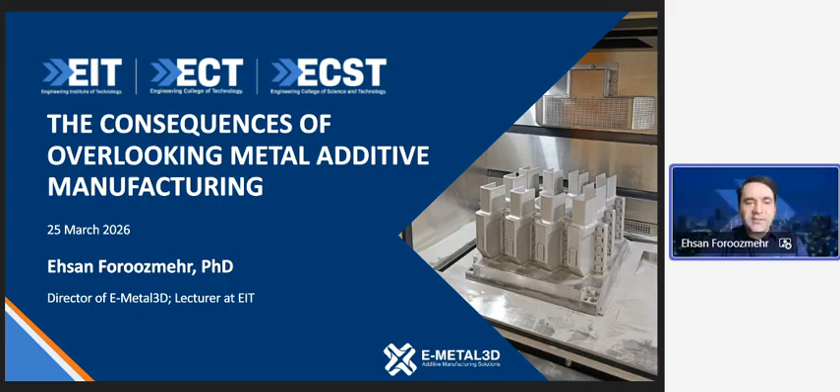As the title shows, we are going to talk about metal additive manufacturing, and hopefully that - which has been my interest in the past 20 years - I hope it's going to be something attracting your attention from now on.

Just a brief introduction about myself. It's now the 20th year of my engagement with additive manufacturing, so yeah, I feel a bit old at this point. I started working on additive manufacturing back in 2006, and at the time it was not really named additive manufacturing. It was more about laser deposition systems and laser powder deposition systems and so on.

That led me to doing postgraduate and postdoc research activity at University of Waterloo later on. And then as a faculty member, I started my job to teach and also do research on additive manufacturing for about 11 years. I co-founded a company to manufacture metal 3D printing systems, the ones that we talk about today.

And also, in 2022, I joined Aurora Labs, the company in Perth manufacturing laser powder bed fusion systems, and worked as their technology manager. Then I found this topic to be really worth investing more.

So I co-founded E-Metal3D in 2024, about mid-2024, and since then I've been the director of E-Metal3D. And in parallel, this is my third year of working at EIT, getting to know a lot of students and doing research along with them.

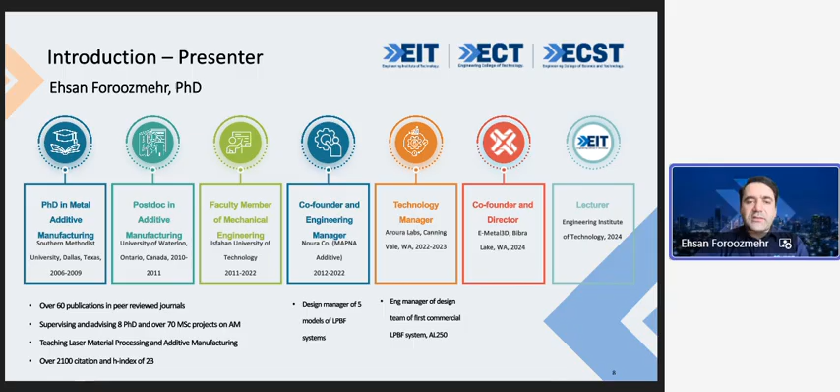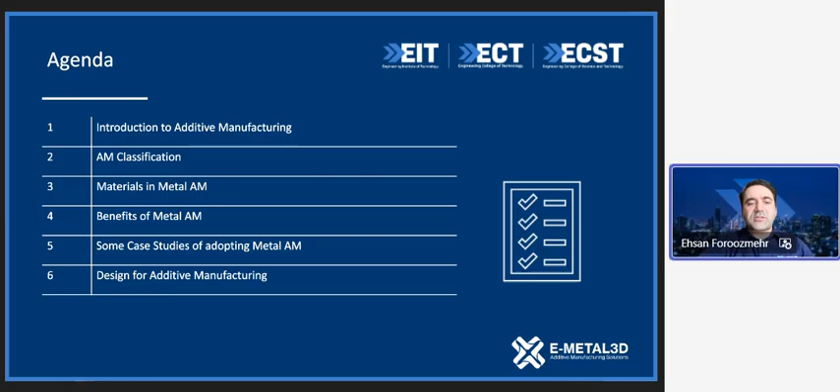So let me just move to our agenda. Hopefully this presentation will cover these topics. As you can see, we'll talk about some classifications, some general concepts about additive manufacturing and the benefits that we can get. And the interesting part would be some case studies on metal AM and design for additive manufacturing, which is relatively a new concept.

In oil and gas, a lot of companies recently, specifically from the past decade, have started to investigate the type of components that could be manufactured with metal AM. More importantly, on the subsea industry, we know that weight is a key challenge in subsea and also in aerospace. These are the industries where weight reduction is really important.

On mining, also, although weight reduction is not really critical there, acquiring and finding out the proper providers and suppliers is the key factor.

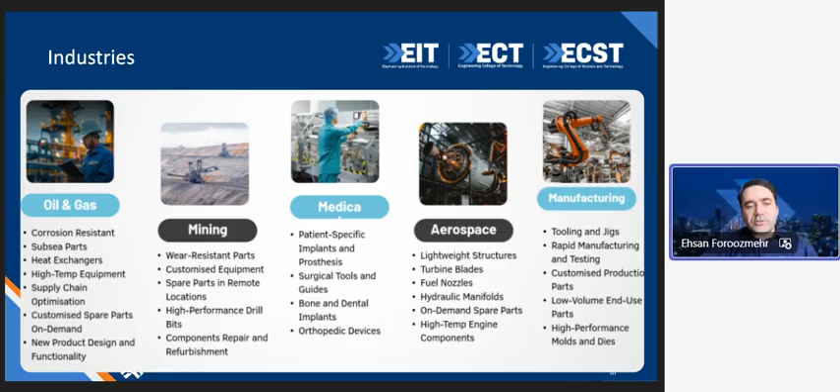Whatever could be manufactured out of metal can be a candidate, but by considering the limitations, which we are going to talk about in a minute.

So let's have a brief introduction: what we actually talk about and name as additive manufacturing. In general, we know that we have three different methods of manufacturing: two traditional ones of material removal and forming - material removal basically starts with the bulk and we start removing the material.

The forming has a mold, whether it is casting, forging, or any process like that - the part is formed toward the press force or high temperature and so on. Then we have the third one, additive manufacturing, where the part is made layer by layer.

It is surprisingly not a new method of manufacturing. Probably we can say even the first invention of humans, making their houses thousands of years back by putting bricks and stones on top of one another - they were using that for manufacturing.

It's not really new. What is new is the actual manufacturing of industrial parts with this technology, which now we can say is about 4 decades passed from the first invention of 3D printing, 3D printers. So nowadays we're not talking about a new technology, but we have to really learn about the technology's limitations, capabilities, and new aspects.

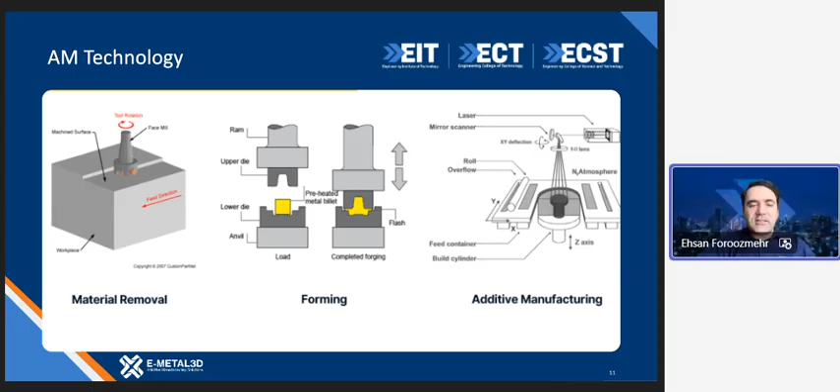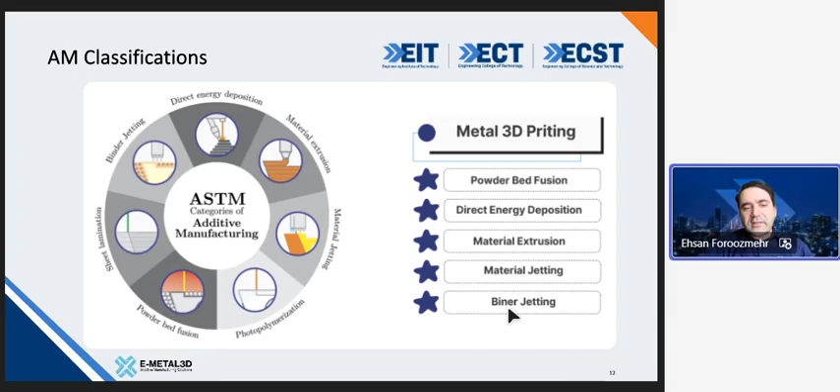Out of these 7, 5 of them are able to manufacture parts out of metal. So when we talk about metal 3D printing, we are not just talking about 1 or 2 specific technologies - we're talking about maybe 5 different categories, and within each category you may have multiple technologies. But not all of them have the same potential, and I'm going to talk about that in the next slide.

And we have 3 other technologies that are indirect metal 3D printing technologies. By that I mean you actually have metal material in the form of powder embedded in a matrix of polymer that acts as a binder to bind those particles together. As you can imagine, this first step of indirect printing is not really metal - it's a composite of metal and polymer.

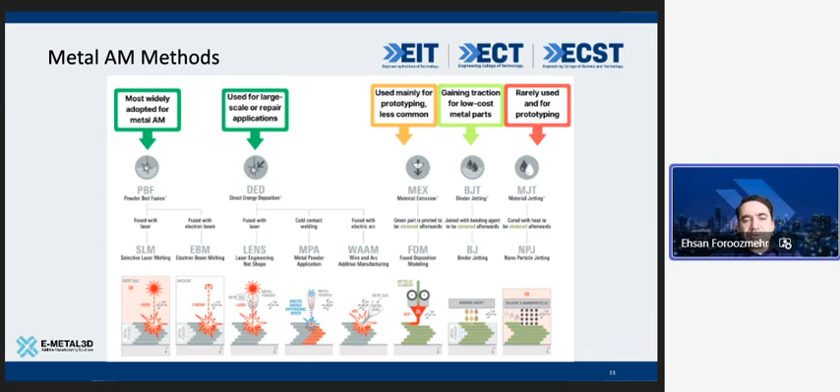It's interesting to know that all three technologies of the DED category have manufacturers in Australia. We have a company in Sydney, LaserBond, for LENS. We have SPEE3D for the second one, and we have AML 3D in Adelaide for the third one that are manufacturing this technology. There are many applications and so much to talk about on this slide, but I will move on to not miss the time. Hopefully if you have some questions, I will be happy to answer at the end.

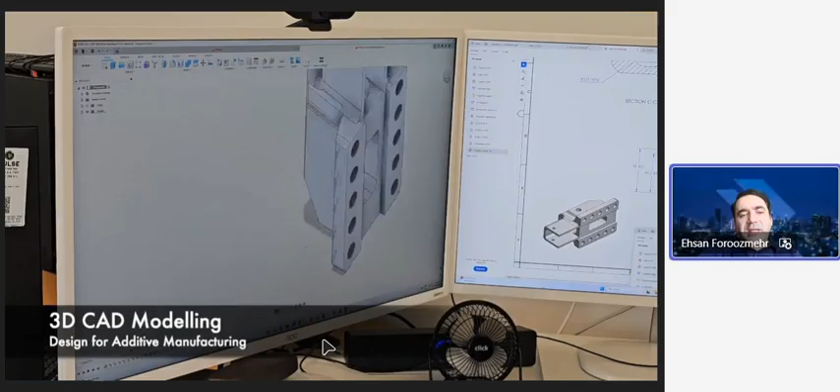This is a movie showing the process. The sound is not really needed. So this technology starts with a CAD model. When we talk about a CAD model, it can come from a design in a computer, or it can come from a reverse engineering process, 3D scanning. Anyway, you need to have a CAD file.

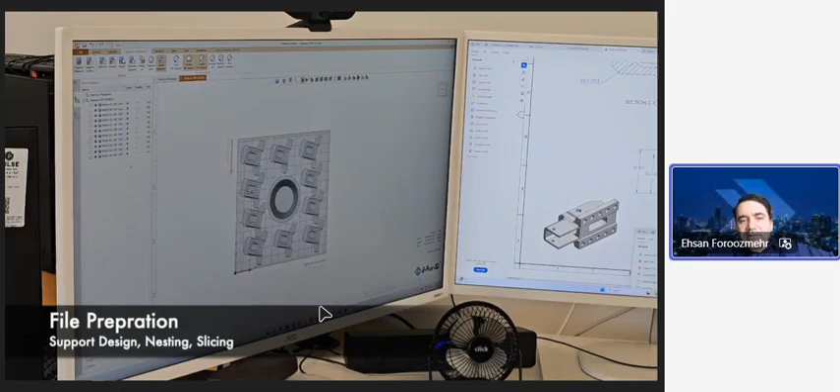Once you have the CAD file, you go through the support design process, where you actually design the support structures, and the support structure will let us overcome the difficulties during the process, as you can see.

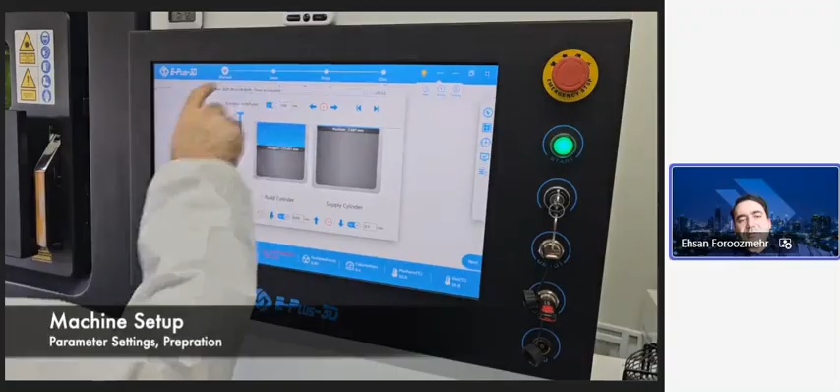And we slice the parts based on the layer thickness, which is critical for us. The layer thickness, we talk about tens of microns. So it is about 30 microns, 40 to maybe 100 microns, or even more. These are the layers that you can actually see, and all the parameters, including the laser movements.

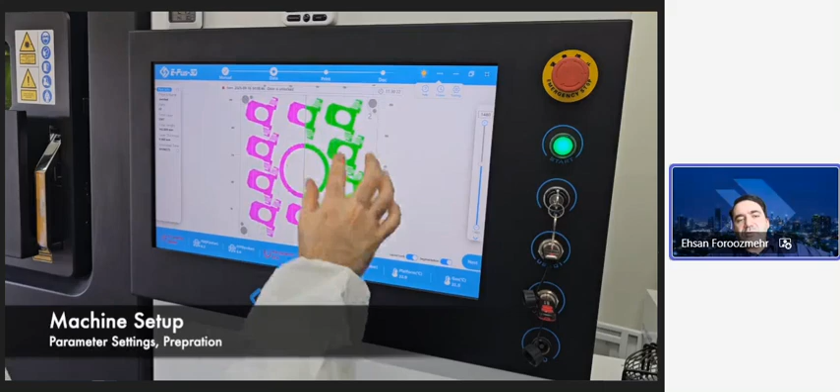Are the tracks that you can actually see in this movement. So everything is predefined in the software and then transformed into the machine. Then the machine starts by taking the information from the software and sending it through the laser system and scanning system to precisely find where the laser has to move and melt the part.

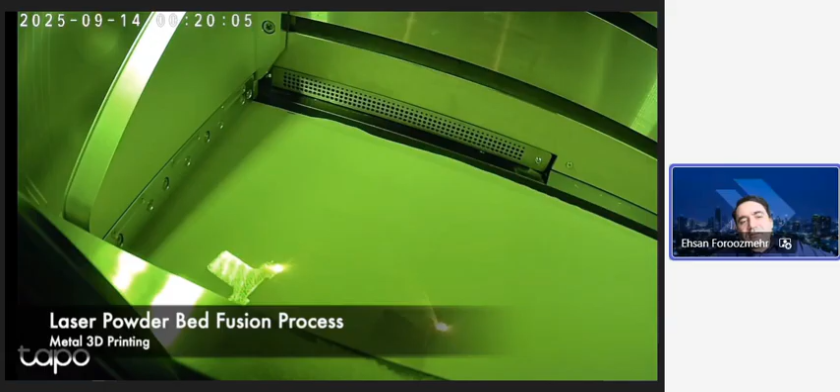As you can see, a very thin layer of powder, you actually don't see the previous layer because the layer is about 60 microns here. But once the process is over, you'll see the next layer come over and you won't see the previous layer anymore. Wherever is melted is the part, and wherever is not melted stays as powder, and the powder will be reused in the next process. That is the biggest advantage of this technology, that the material waste is very, very low because of reusing the powder after printing.

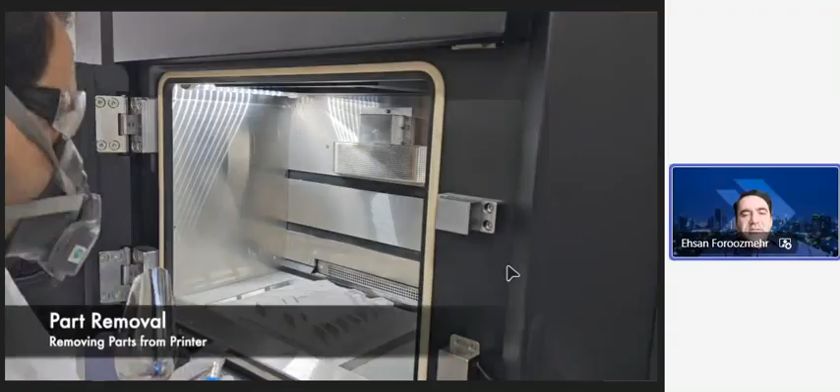As you can see, the part removal happens right after, so the speed has been increased so that it doesn't take much time. As you can see, the person has to have proper safety gear, mask, and the anti-static hose.

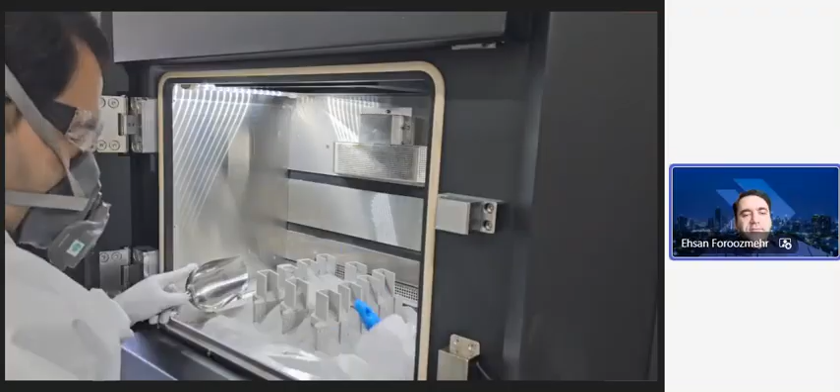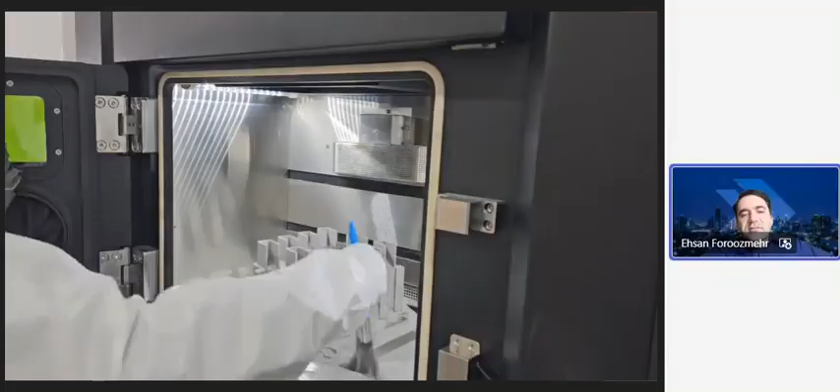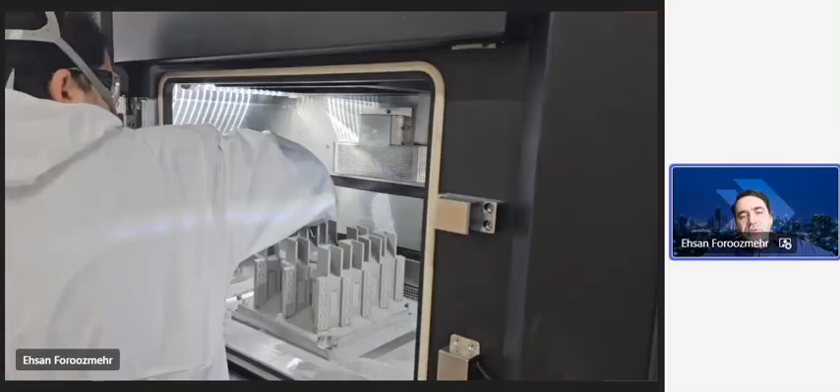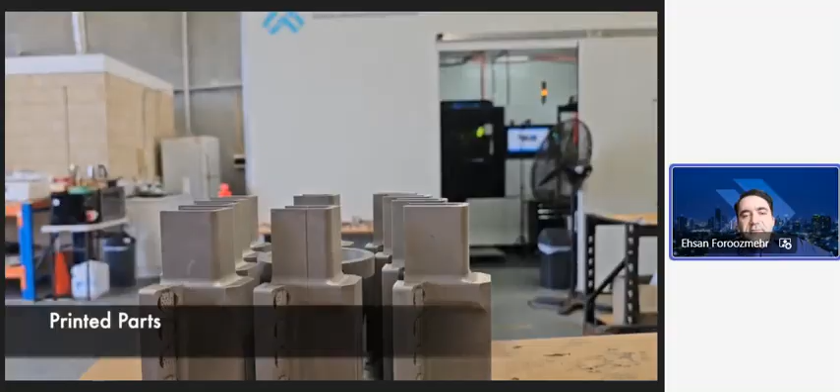That is the end of the process for printing, but obviously you need to do some post-processing. For example, we need to get rid of all the supports that we added. The supports are not meant to be there. We had to put them there because we have overhangs, some limitations. We need to make sure the part comes out properly. And if the surface requires more quality, then we can also do post-machining.

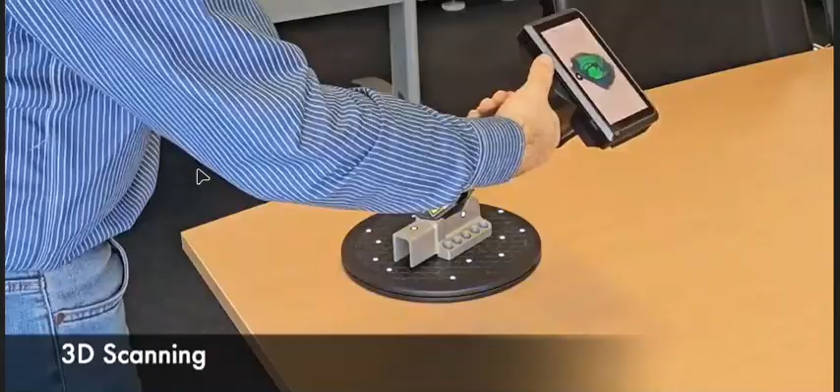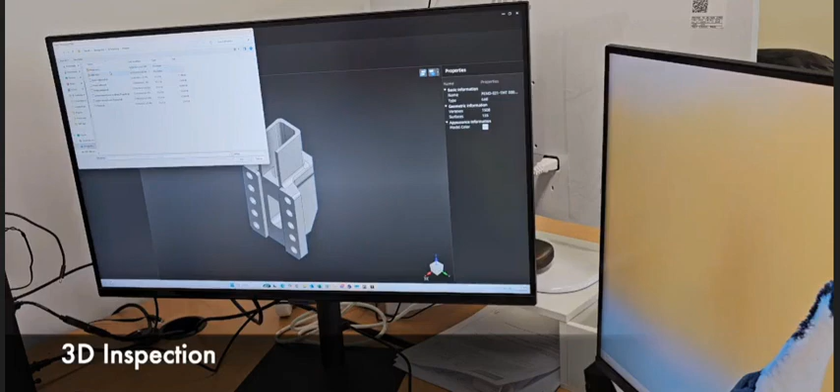So this is a 3D scanning step that you may or may not do. It's just a step that you sometimes take to make sure the quality of the printed part is good enough and matches the desired CAD file. In this process, the scanned part is taken by the software and is mapped with the actual STL file.

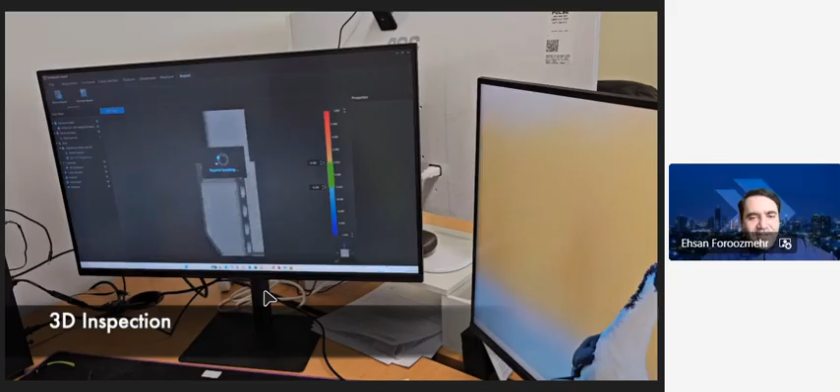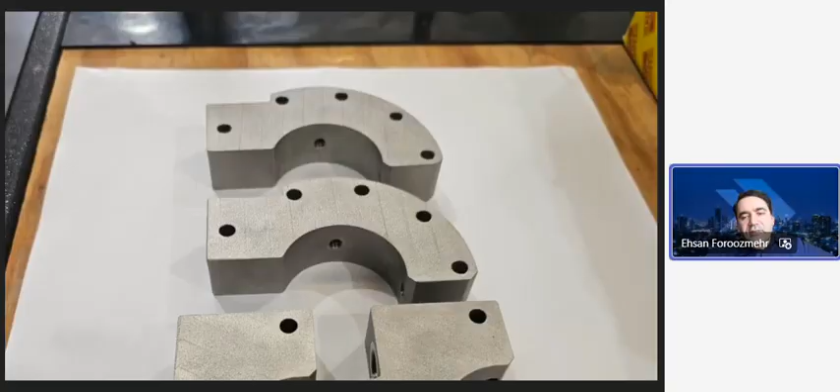So I was just saying that this last step is an inspection and quality control step that you can measure and quantify the deviations from the printed part and the actual CAD file.

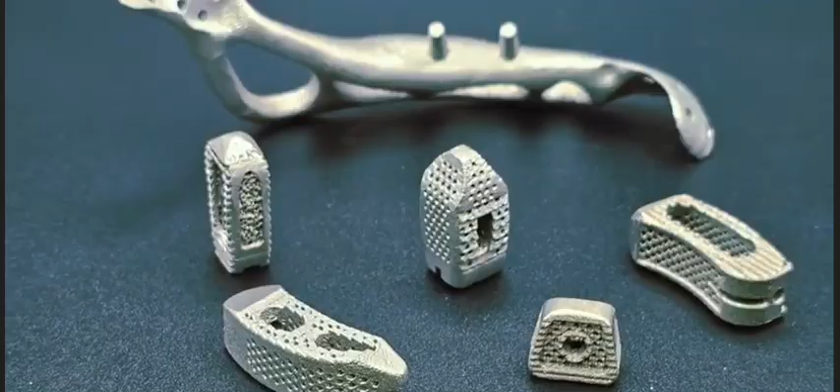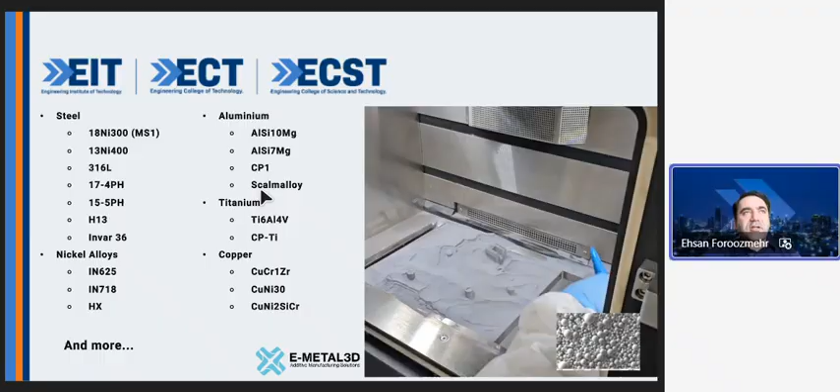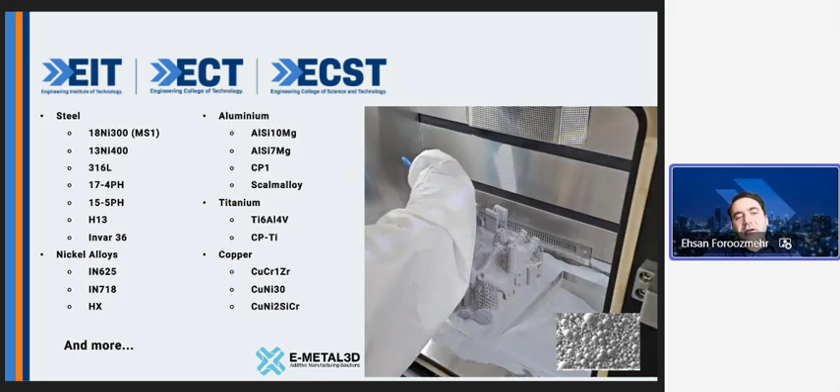So these are some examples of the 3D printed parts, and you can see some examples on the technology, the medical sections, and variety of applications. So when you talk about material, this technology started with probably a few materials, not really very wide. But throughout the past 15 years, I would say, the number of materials to be printed has expanded a lot.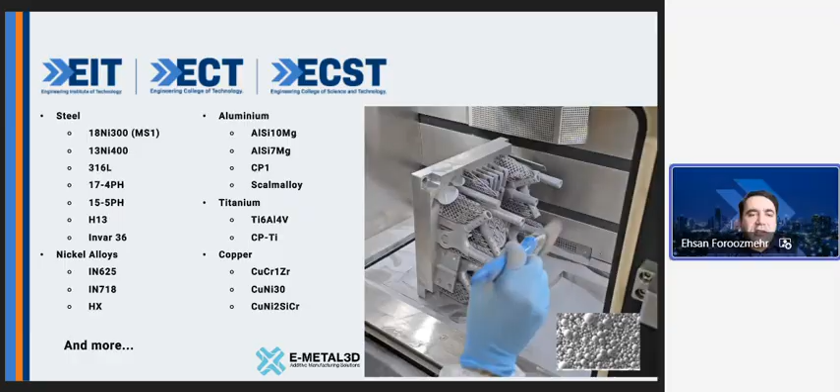So this list is relatively small yet, and I haven't put all the materials in there. But as you can see, there are a number of materials that could be chosen from this list. On the other hand, there might be some materials that you would look for and you can't actually see them. For example, where is the plain carbon steel or 4140 or something like that? Materials that are very common in industry.

That's right. Not all materials are yet printable at this point, and not all materials are worth printing. That's another point. Because of that, we need engineers to actually think about some replacement at some points and finding better solutions, or finding solutions that actually can meet their needs. So that is sometimes needed, and maybe in the future the expansion happens.

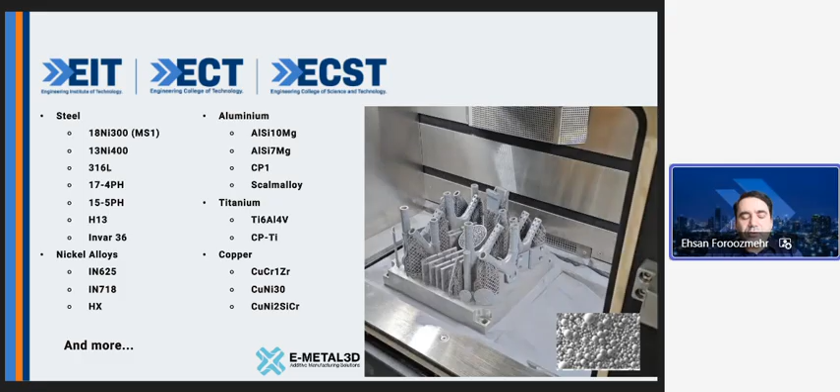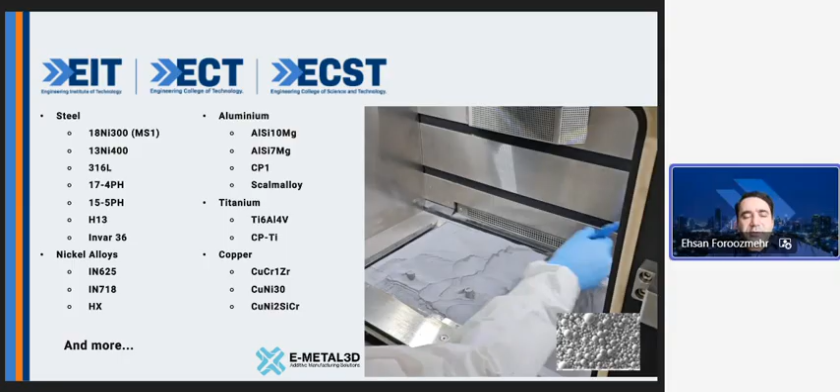When we talk about materials, they're not necessarily conventional materials. There are new materials like CP1, for example. There are materials that are dedicated for metal 3D printing, designed for additive manufacturing. I will probably have an example when I reach there, I will show you. But they provide specific properties that you can't actually expect from conventional alloys.

When we talk about properties, the main question I always receive is, what is inside? How does the inside look like? Do we expect any porosity? Do we expect any lack of fusion or something? Well, the fact is we can't really say it is 100% dense, but the fact is it is dense enough to say it is fully dense.

The density is over 99.5%, and in many cases over 99.9%, which, if you know casting, for example, has a much higher percentage of porosity. 2-3% is very common in casting. So when you talk about 99.5% and plus density, it is considered to be fully dense. Because it is fully dense, it can actually be polished to a mirror surface, something you can't really expect from powder metallurgy technology, because that is not fully dense, so you can't actually get to a very shiny surface, but here you can.

The surface area is not fully shiny, as some of the examples on the movie also showed, because we are talking about powder, and the powder is rough at the surface. So what happens is there will be some roughness at the surface. The roughness changes from 5-6 Ra, sometimes larger, sometimes less. We've had experiences of like 2 micron and sometimes 8 and 9, depending again on many parameters, including the powder size and also other aspects of the parameters.

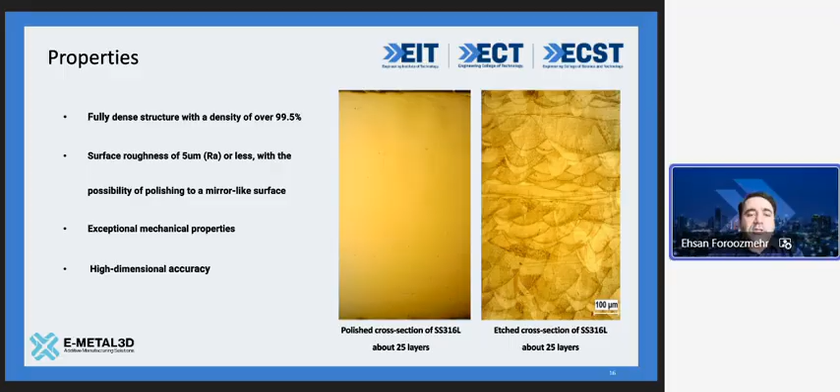This table, which is quite small for myself, I hope you have it larger, shows the properties for some of the typical alloys, like stainless steel 316. This stainless steel is widely used in industry. Just to know, the yield strength of a round bar of 316 in the market is about 220, 230 megapascal for the yield strength. And as you can see here, it is 500 plus yield strength. So we are expecting double the strength when you 3D print that material.

So we are not actually talking about some missing properties or lowering the standards, but also we're talking about raising and increasing the standards of the strength we expect. In other materials at the same time, for example, titanium, you expect titanium when it is very high strength to have low elongation.

But as you can see here, the strength is high. It can go beyond 1,000 to 1,200 megapascal, and also having 10 plus percentage of elongation. And the same for other materials. You see some heat treated properties as well.

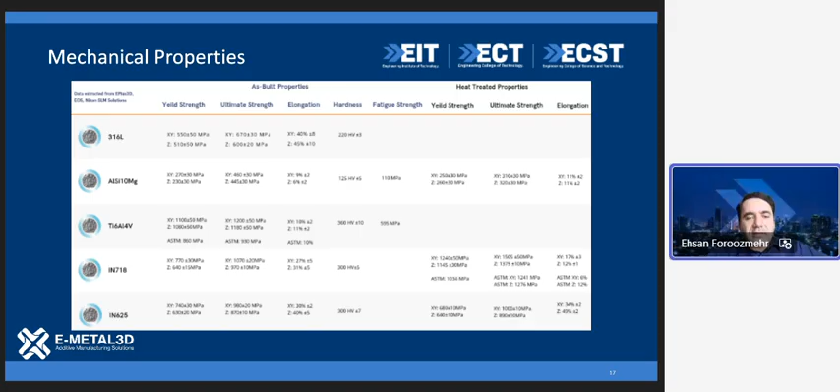That heat treatment is not necessary for the process. It is not like, for example, metal FDM that requires sintering to become metal. This heat treatment is just a metallurgical improvement of material that is already fully dense, but you expect the metallography and metallurgy of that to be stronger or better in some sense. So heat treatment sometimes becomes the extra step you need to follow if you want special properties.

So let's look at some key properties and why, if we don't use this technology, we're really missing an opportunity. One advantage of metal AM is less material waste, and you can imagine why. To have a better idea, there's a parameter called buy-to-fly ratio, which means the ratio between the actual raw material you buy and the final part you deliver, and that ratio tells us how much material you're wasting.

It's very common in aerospace specifically that the material has to be thin and light enough that ratio reaches like 11 to 1 or even 30 to 1, meaning 30 times more material wasted than used. But with additive manufacturing, that number can go down to 2 or even less. Meaning if you have a 1 kilogram part at the end, you're using at most 2 kilograms of raw material. So that's a huge difference between the two technologies.

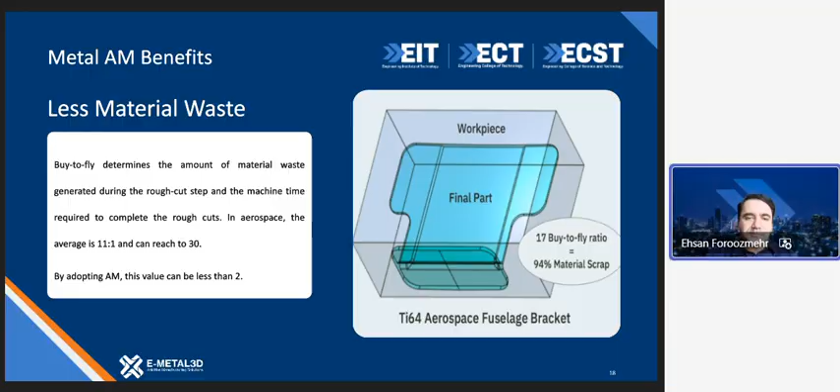The next benefit would be the carbon footprint, which is something interestingly growing in the past few years, or even decade, I would say. But recently it's been attracting a lot of attention.

When you talk about carbon footprint, definitely one part comes from the less waste, because we know that manufacturing every kilogram of raw material generates a lot of carbon. But that's not all; also when you talk about less weight, that means we're using less energy to move the part, and less energy to fly, for example.

We also have a part consolidation concept, which I'll talk about at the end of this presentation. That means instead of manufacturing multiple parts and then joining them together, you can make them in one go. That means you're excluding a lot of extra steps of manufacturing, welding, and post-processing, which can also help lower the carbon footprint.

On-demand production also helps society very well, because when we talk about on-demand production, that means we produce whenever we want. We don't have to produce and put parts in stock for a long time. So that's another advantage.

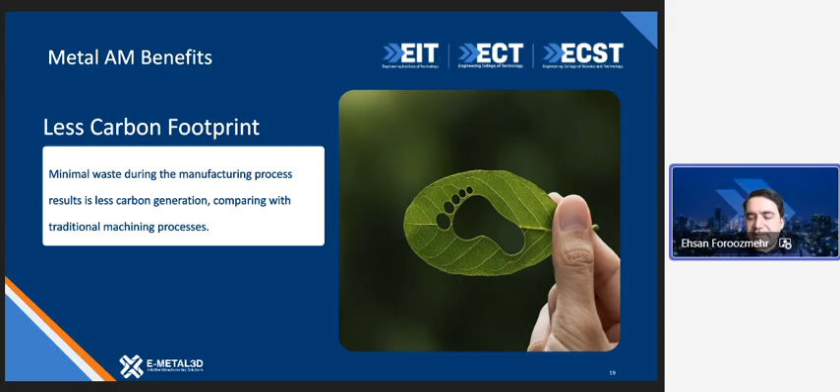We also have the capability of repairing and reusing broken parts by additive manufacturing. Because of all these things, we definitely see less carbon footprint. But at the same time, don't forget that manufacturing powder produces a lot of carbon, so we shouldn't forget that. But considering the other advantages, that's something to factor in.

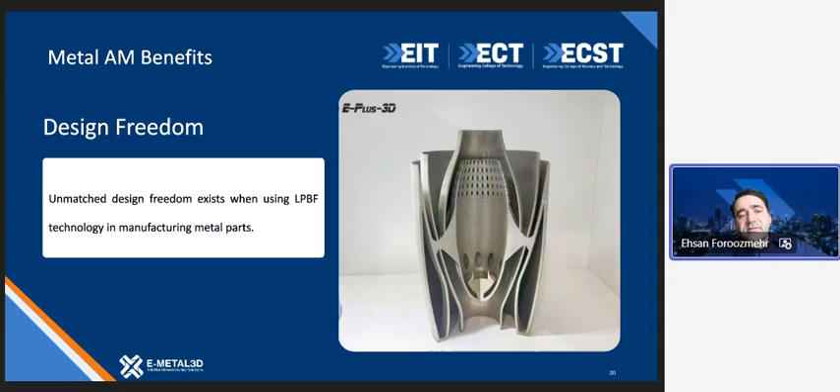You may design multiple parts - forming, casting, rolling, and all sorts of things - and then weld them together, but you cannot really do it in one go. That's really important to know when you talk about design freedom. It gives us the opportunity to rethink all the constraints we had in mind. And that's probably the most important barrier in using this technology, because designers have to start rethinking all the constraints they have in mind.

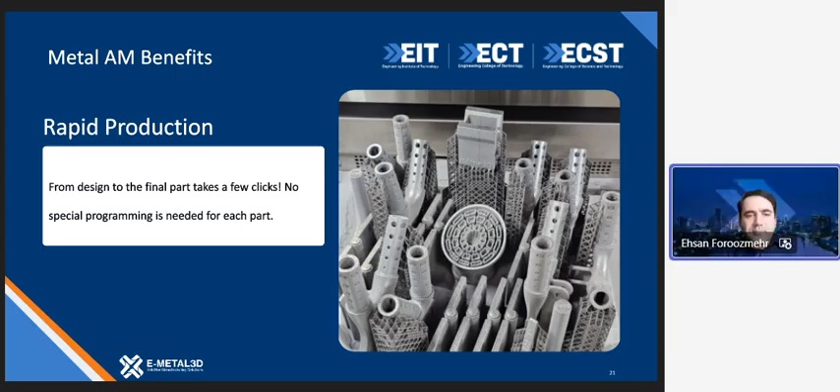Rapid production. Sometimes when we say rapid, we expect 1 hour, 2 hours, or maybe if 10 hours. But we had prints that take 3 days, for example. Can we call it rapid? There are large machines in the market where one print can take 1 month, and it's not really easy to call them rapid. But if you consider the other methods and the multiple steps you have to go through, then definitely that is considered rapid. We have received many cases where an order came on Wednesday and was delivered on Monday, because we can run the machine overnight with no limitation on that. So that is a game changer in the supply chain for many parts, specifically in Australia, where we sometimes have a really difficult time getting what we need from overseas.

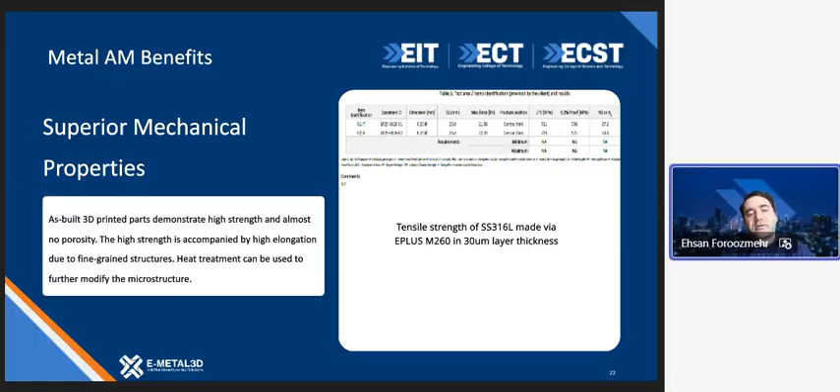Superior mechanical properties - that's what I just talked about. We are not talking about losing strength; we are actually talking about improving and even using higher quality and higher strength parts. So that is really important to know.

Weight reduction comes from the fact that we are free in design, and that freedom in design will lead to weight reduction. One would say, why do we need to reduce the weight if we don't need that? For example, in mining, who cares if I reduce that part from 2 kilograms to 1 kilogram? Well, that's right, probably for some applications. But if we don't do that, probably we can't really get the benefit of this technology right away, because the cost of manufacturing becomes very high.

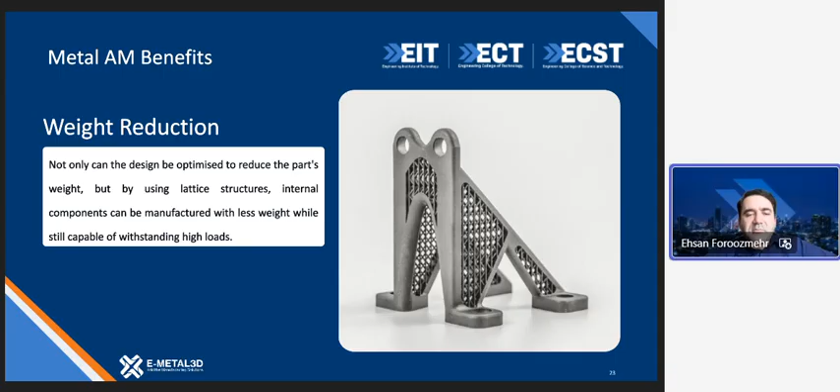In this technology, complexity is not really important for the price, but the weight is very important. This part, as you can see, is very complex. But if you just fill all those holes and make it a simpler part, that becomes more expensive. That is the difference between CNC machining and metal additive manufacturing. In CNC, complexity usually means more cost. In additive manufacturing, complexity doesn't bring extra cost. But if you can reduce the weight, we should consider that to make the benefit of this technology and make the part really reasonable to print.

Wide range of material - I've already talked about that, and this is the one I wanted to show you. For example, this alloy has been developed by Constellium, a French company. They have been claiming, as you can see, this is the typical aluminum Si10Mg material in the middle, and the green shows the properties of this Aheadd CP1 alloy. As you can see, in many items - in all items, I would say - you can see the advantages. The surface finish, for example, or the strength, or more importantly, the thermal conductivity, which is very important for heat exchangers. The thermal conductivity is about, I think, double or maybe a bit less - 80% more than the typical aluminum used in this technology. That's really, really interesting to find these properties. You can see a lot of information like that for other alloys being developed nowadays in the market.

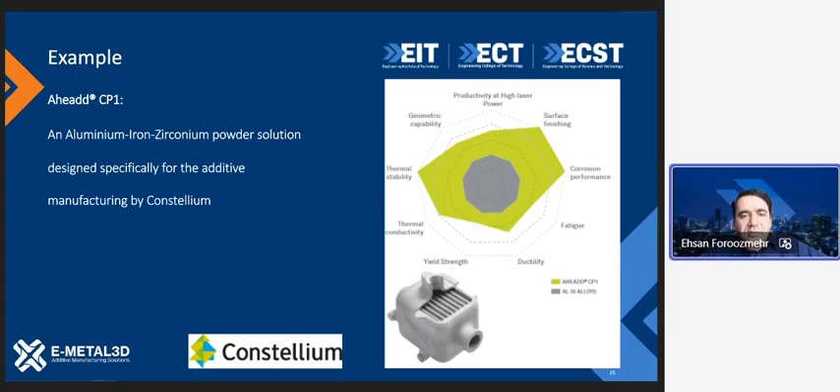The next one is topology optimization. It's quite similar to the weight reduction I just mentioned, but it's more about using software to tell us what would be the best design. As you can see, probably no human can come up with such designs - they are mostly software-driven designs, and usually they start with our typical engineer-designed part. Then you tell the software the load I have, the constraints I have - for example, here has to be clamped - and my objective is to reduce the weight. The software, with the aid of processing capabilities and AI, will go through multiple steps, trial and error, and finally give you some options. You will choose this design because it definitely does the job, and also it has less weight and much less cost for manufacturing.

A similar process has gone through for these two. For those who might be interested to follow up this topic, generative design is something to follow up on - Fusion 360 has this toolbar, and nTopology also has this toolbar. If you're interested, there's very good potential in the future - if one knows how to deal with these types of features in these softwares, there's a lot of potential for the future, because you will see parts in the market in machines very soon to be in this shape.

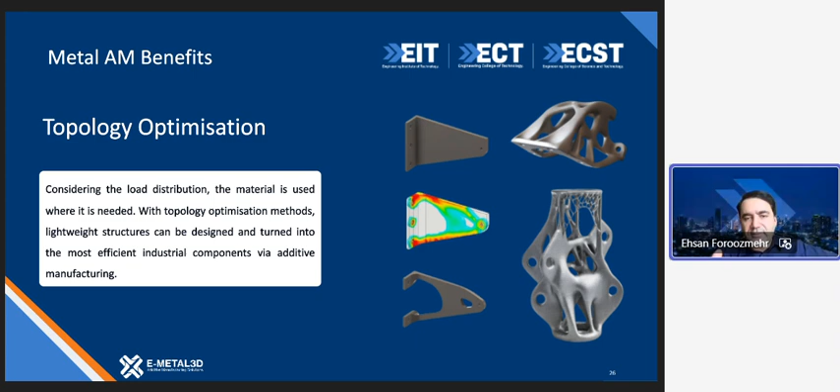Probably the last benefit of Metal AM I would call part consolidation. This is a very nice example of one part on the right side, which if you want to do it in a traditional way, you have to make all these parts on the left to finally get the same application or usage as the right one.

It is not really difficult to imagine how many drawings, how many inspection steps, how many welding or joining processes, tolerances, and everything has to be taken into account when we are dealing with so many parts. But with the other one, everything happens in one step.

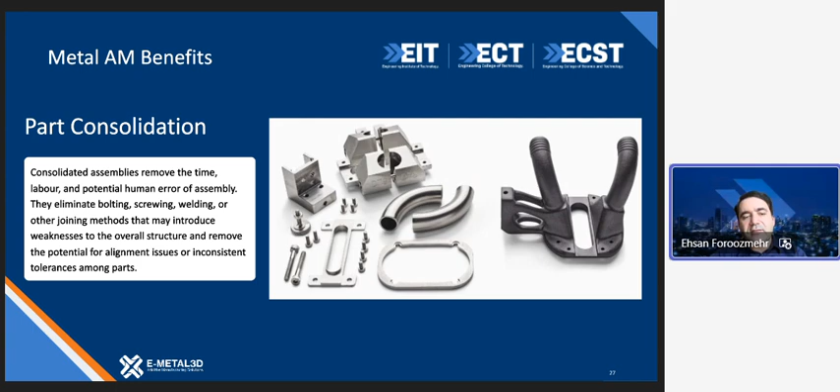Definitely we need to consider many things. It is not just a simple step, but if we take on all those difficulties, then the final part is much less expensive, reliable, and easier to handle. If anything happens and we want to replace it, we can think about replacement faster.

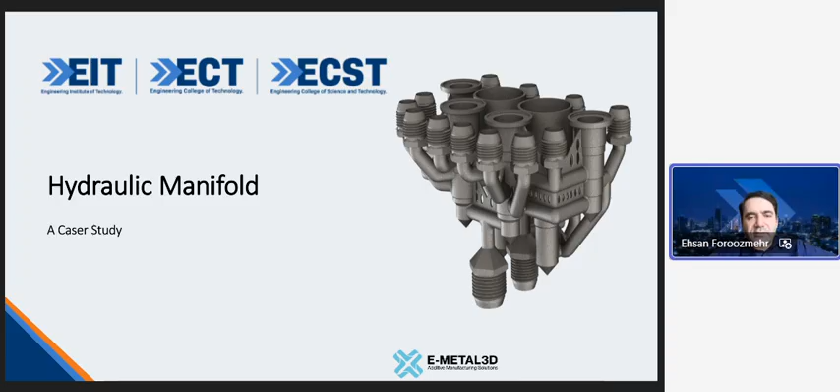One of the examples of applications would be hydraulic manifolds. Hydraulic manifolds, as one of the key industrial components, have been used with traditional methods for many, many years. It is not something really surprising, but those in this industry know how difficult it is when dealing with a block like this.

You should drill many holes, vertical and horizontal, in order to make passages from one plane to the top plane. For example, you drill one horizontal hole, one from the top, and then block the other side. So you see many caps put in there, and all of them are 90-degree holes connected to one another. They are very heavy, the pressure drop is relatively high, and they take a lot of space because of how they look.

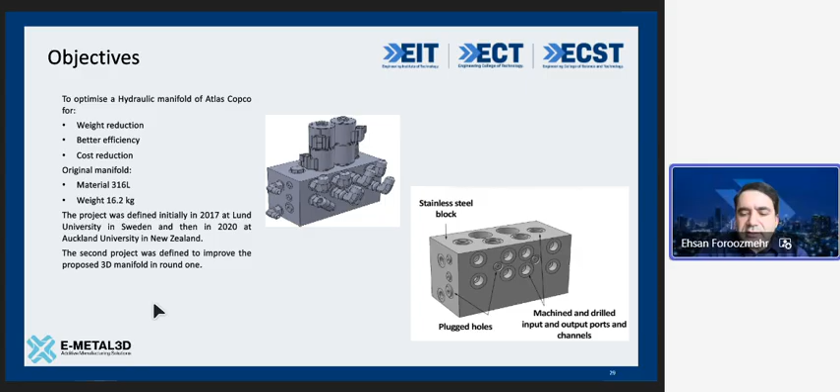But have a look at this project. This project was defined by Atlas Copco in 2017 at Lund University in Sweden, and again in 2020 at Auckland University in New Zealand. In the first round, the project was modifying this block. The problem was it was 16.2 kilograms, and they wanted to reduce the weight and improve efficiency. That was the objective, started in 2017, about nine years ago.

This is the outcome. They came up with a design that was relatively good, less weight, but the design required a lot of supports to make it work, and those supports created a lot of challenge after printing when they wanted to remove them.

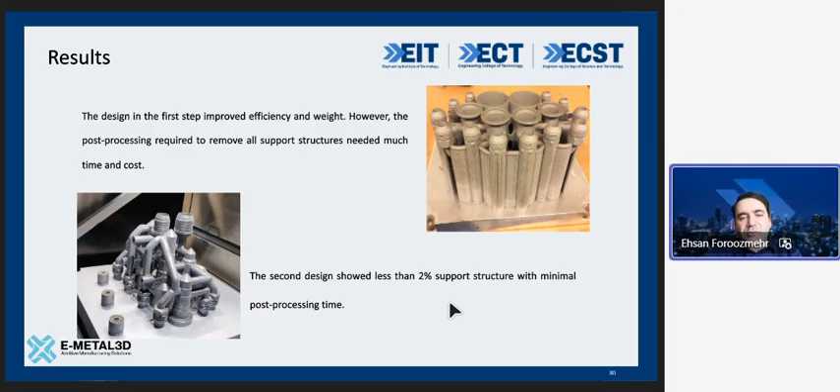That is why in 2020 they defined the project again, and in the next round the engineers came up with this design. As you can see, all the ports, inlets and outlets are the same, but they came up with a different orientation for the printing and modified the connections between the tubes so that they didn't need much support, instead using the actual tube holders as support, reducing it to just 2% for support. With that, they could make a huge step forward.

So this is the design process. Everything starts with the block, which comes from the designers of the hydraulic manifold. They tell us how many inlets, outlets, and what the connections look like. Next, they start to consider a minimum thickness everywhere. We know what the pressure is, we know what the diameters are.

We assume that 2 millimeter or 3 millimeter thickness from that material is enough, so everywhere should have that thickness. Then they get rid of all the sharp corners by making fillets and so on. What is left is the connection between these pipes, because you can't have pipes hanging around with such high pressure. So they added extra latches, connections, and extra walls, not only so they're there, but also to help avoid needing any supports.

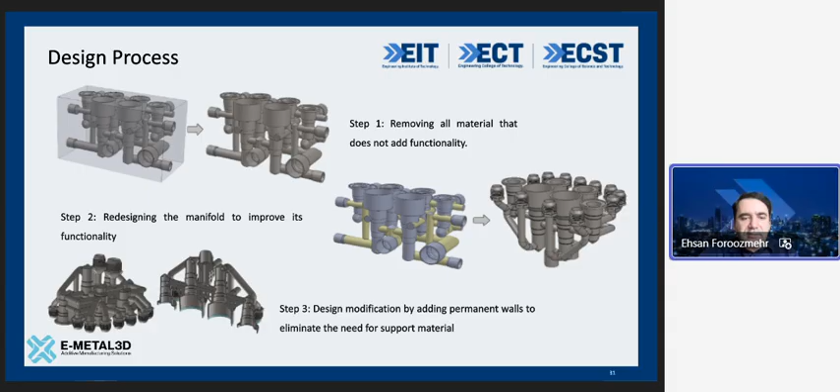So the summary was this part: as you can see, 1.4 kilograms, more than 90% weight reduction, 24 hours of print time, and it can handle fluid pressure of 660 to 680 bars, which is really huge.

This is a very nice example, although there are many companies nowadays doing similar things—I removed that from this presentation since it would be very lengthy—but there are many companies in the market that have products in their manufacturing line using additive manufacturing for even small hydraulic valves.

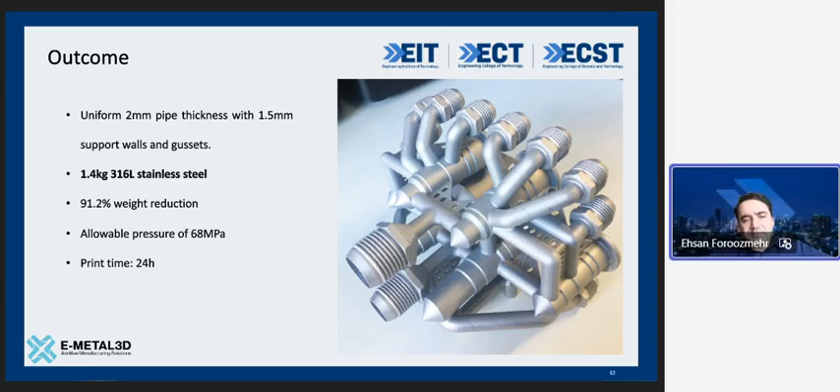The next story is about this microphone. This is a very interesting challenge that this company, Dr. Alien Smith, brought to us. What was the problem?

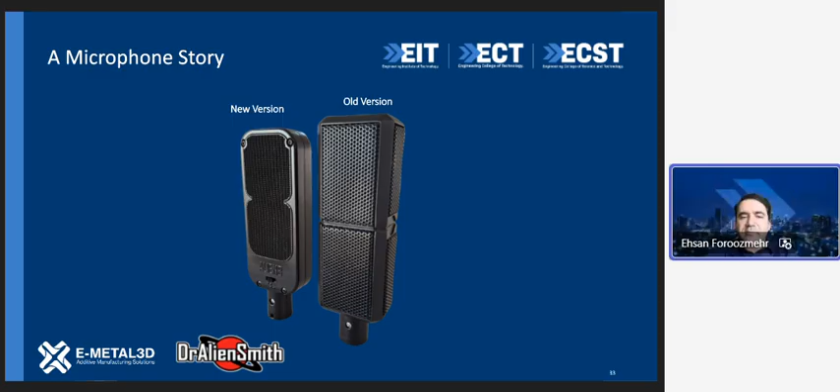The problem was this old design microphone's main issue was that it was discontinued. The frame, which was two separate boxes, was imported from China, and that company was not manufacturing them anymore. Plus the mesh plates on both sides, plus this section, which was manufactured separately and then assembled.

Altogether, that was a challenge. The manager came to us asking to print exactly what it looks like. So he was happy with that - maybe not very happy, but it was working. So he asked us whether we could print it.

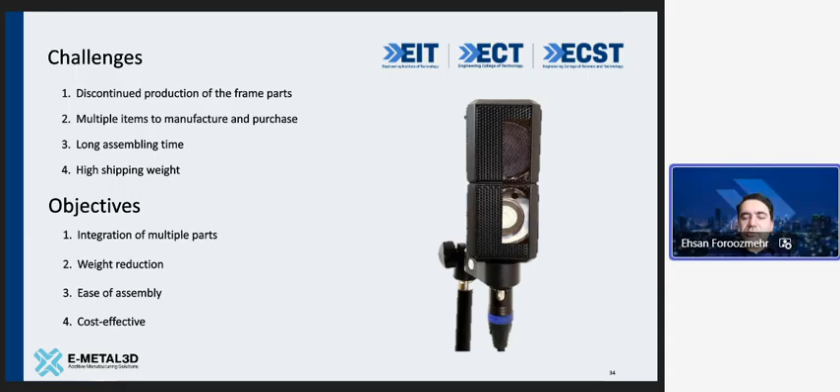We asked about the difficulties he had. The assembly process took about 12 parts per week - he could assemble 12 microphones per week, then realize this isn't really the right design. So let's think about a way we can get rid of all those extra steps of assembling. Instead of having two pieces plus extra caps to cover and extra connections, let's consolidate everything and make it one part with just some screws. So that is where it started.

We came up with - because Alien 8 is the name of this model - we first started with the 8 shape design, but he didn't like it. So we moved to the square design. Through multiple trial and error, we found out that we could actually print the mesh structure directly with the part.

About 12 or 13 rounds of print trial and error really happened - I'm just showing that in brief. In one of the last ones, you can see there are some supports here that are not here, meaning we had another improvement to reduce the post-processing time.

When you're dealing with just one part, one time, you don't really think about that. But this is about 40 per month - we had to make 40 per month, and think about even more. It forced us to really think about optimizing every single step.

Post-processing was a key step that was taking a lot of time. That is why we reduced the support even from this much to a very small support that you can actually see here, and that reduced 2 hours of printing as well. So that was a saving in time and money.

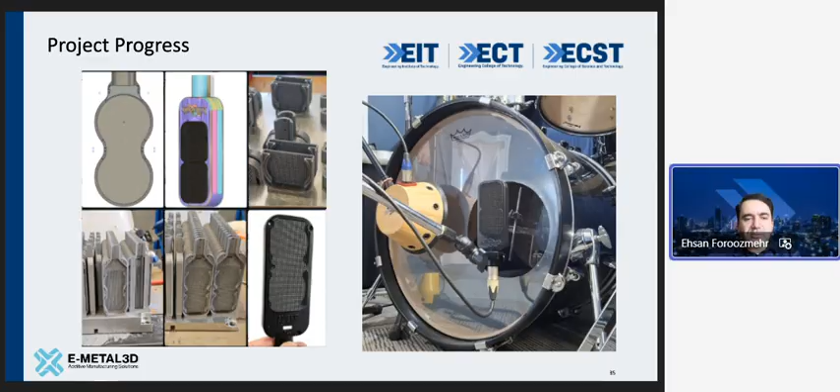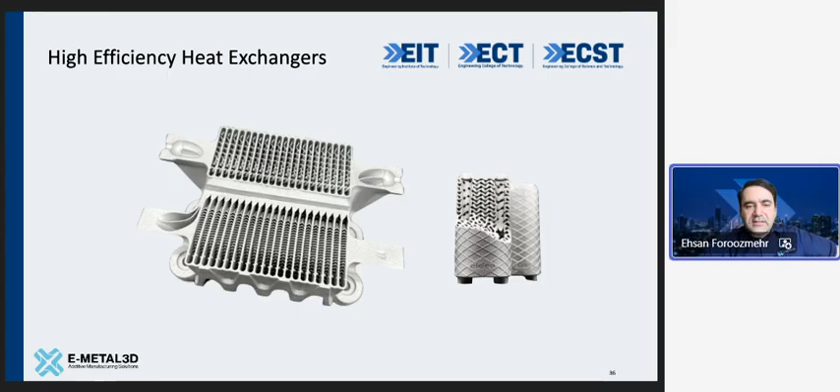Another example is high efficiency heat exchangers. You have heard about that probably here and there - there are many video clips out there that you can see. But why is it important for these heat exchangers? It goes back to the capability that this technology gives us.

These are the list of benefits we can have. For example, one of the main ones is large surface area per unit volume. If you want a specific capacity for heat removal from a system, you need, for example, 1 square meter of surface area, and that means this much volume. But with this technology you can reduce the volume to something smaller, because you can use surfaces that are very complicated but provide high surface area.

Another benefit is it's very compact and lightweight. Obviously for mobile systems, automobiles, aerospace and everything, it's very, very small. You don't need any brazing, and by consolidating the casing, internal parts and all the shims into one go, that's much saving in time and cost.

There is no leakage. Fluid flow can be optimized, so all sharp corners are gone, all potential for pressure drop are gone, and heat exchangers can be corrosion resistant. It doesn't have to be aluminum - we have orders from companies with heat exchangers in very harsh environments, so they print it out of stainless steel, and we know that's not easy to do with conventional methods.

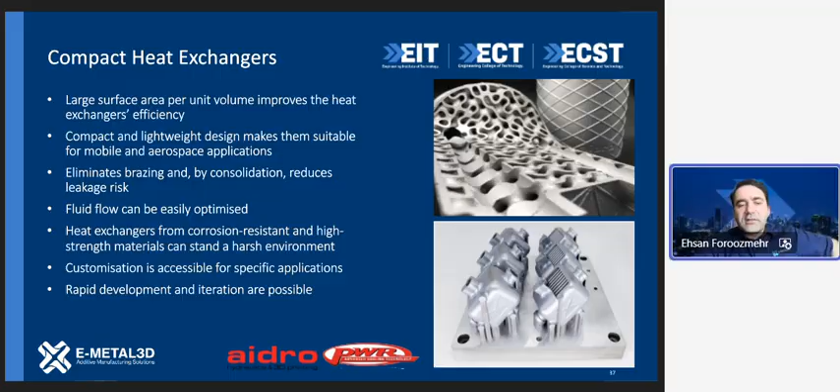Rapid development and iteration are possible, so you can optimize and customize your heat exchangers for the benefits you need. We have companies like Aidro and PWR - PWR is an Australian company manufacturing their heat exchangers based on additive manufacturing. And one last example is the new generation of Apple Watch.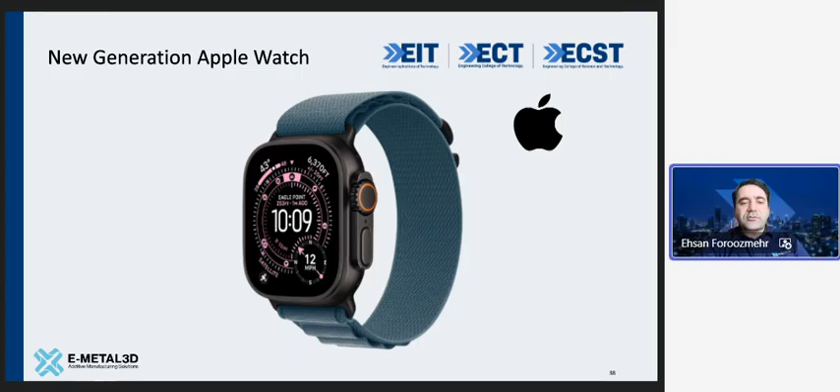Probably the importance of Apple Watch is not only because it's Apple and other companies could use the technology, but Apple has changed some previous assumptions about additive manufacturing to the next level. Whenever I used to teach students in the past 5-10 years, I always used to say when dealing with low numbers, additive manufacturing is good, but when dealing with high numbers, AM is not really the option. But this is probably the first global example of using additive manufacturing to manufacture in the order of millions. It was very secret news 2 years ago, but now we can see that product is in the market.

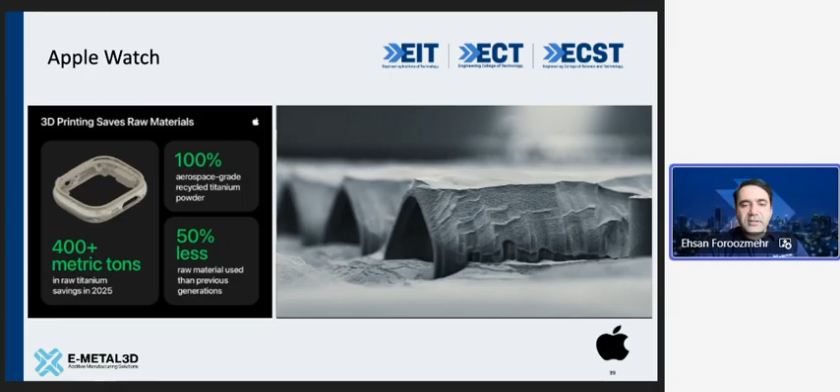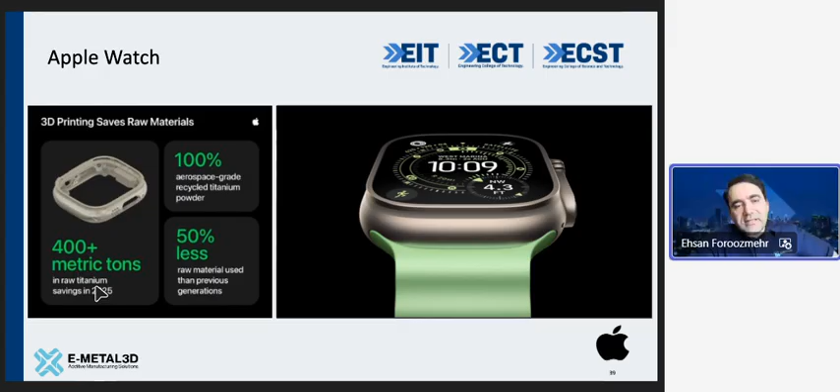As you can see, this is SLM technology. They fit many of these casings in one batch, and the post-processing happens. These are the claims the company makes: 100% aerospace recycled titanium - these are just big words to attract attention, but this is titanium. It also says 50% less raw material is used compared to previous ones, and that is interesting - 400 plus tons of material waste saved, or less waste happening.

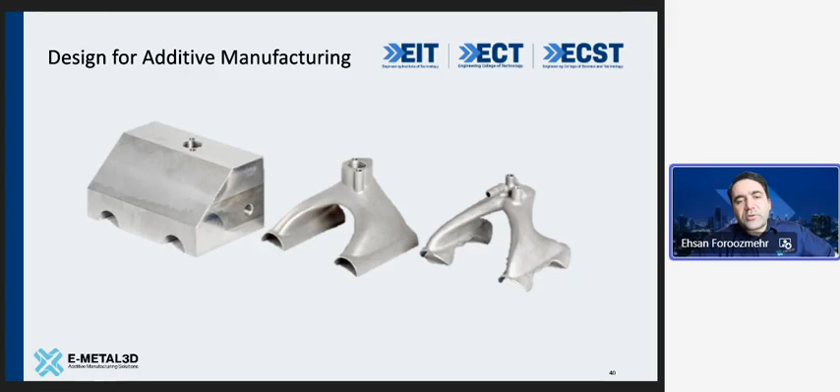So with that, the examples are done. I'll just take a few moments about design for additive manufacturing. All these benefits can only be used if we take design for additive manufacturing seriously. We can't say this part, for example the left one, has been manufactured by CNC, so I want to do it with SLM and it should work well. Obviously SLM can print that, but it's going to be triple the price of CNC or even more. If you want to really use AM in a serious way, you need to think differently - it has to be done differently. I don't say it's for all cases, but in some cases it's really important to think about the benefits. So here are some key factors of design for additive.

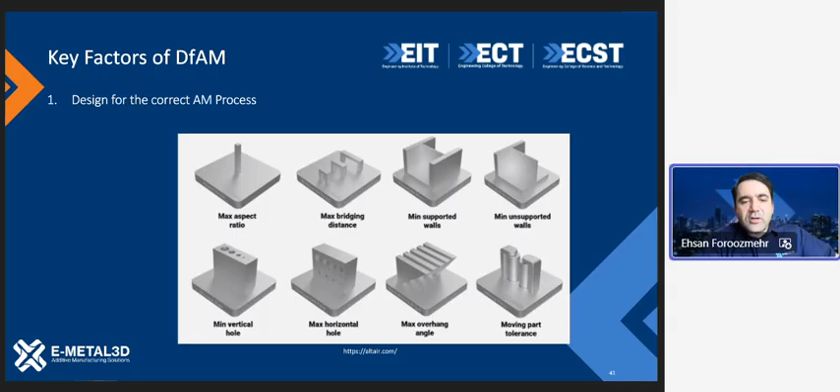One is design for the correct AM process. There are some general rules about additive manufacturing that many people know - the ones you have, probably you have a plastic printer at home, but the limitations on that plastic printer are different from the metal printer or from a DED printer. So we should really know what technology we are going to use. All the minimum feature size, accuracy, and so on definitely depend on what type of technology you're using.

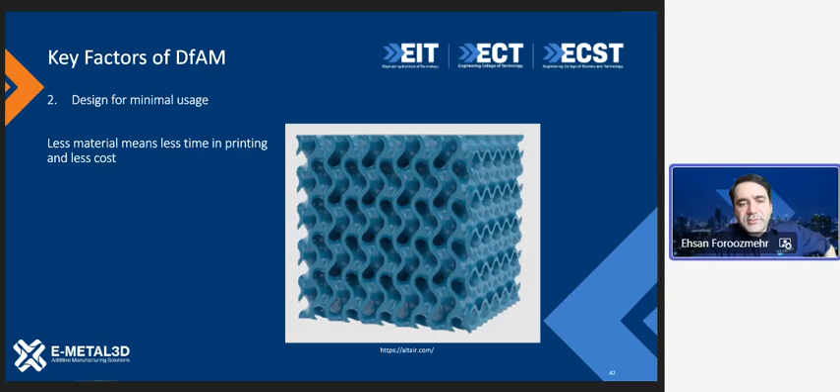Design for minimal usage - don't think that if the client doesn't need to reduce weight, why should I bother? It's important to consider opportunities and options like mesh structures and so on to reduce the weight. That is how we can have additive manufacturing really showing its potential.

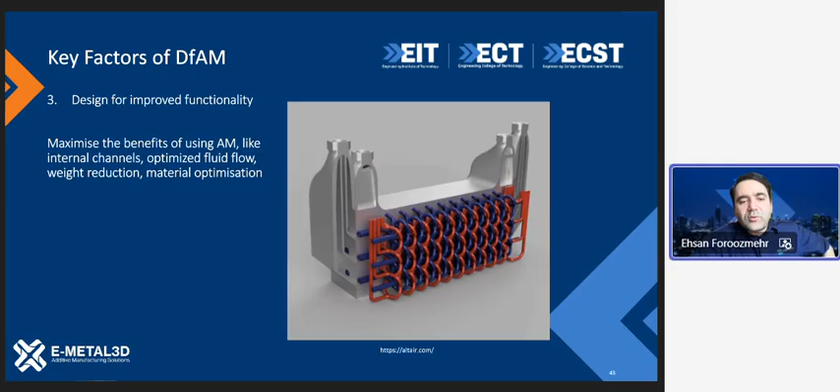Thinking of improving functionality, there are so many applications using internal channels, for example internal cooling channels for many applications that have never even been thought of because they were not possible. But now you can think of having internal cooling channels, for example in your plastic mold, and that can change everything. Also design for part consolidation - if we think about that, we can definitely get a lot of advantages out of this technology.

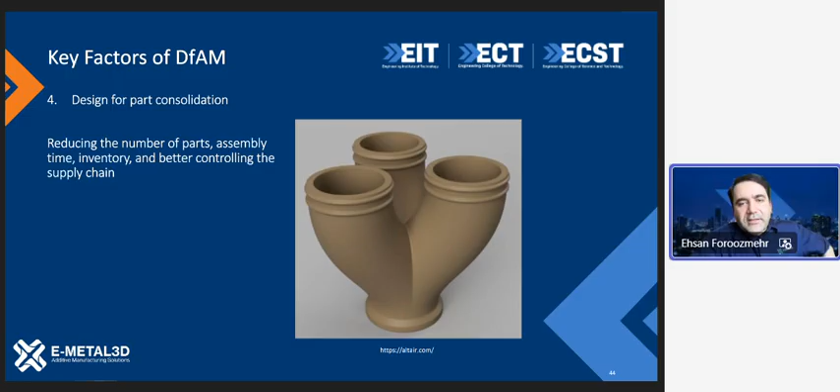So that would be my last slide. Just quickly saying that we are planning with EIT to have a workshop on additive manufacturing. The workshop would be a 3-day workshop with extensive topics, whatever I just mentioned. We will go through more details, and also we will have a live show of the process - that is how we can get more sense about what is really happening. Live post-processing, live printing, and some software applications that hopefully EIT will announce soon. So thank you very much, I'll be happy to take some questions.